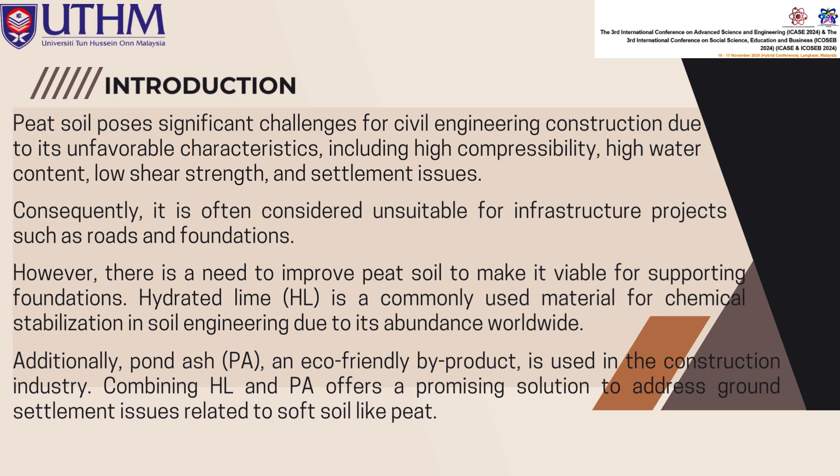To improve its suitability, hydrated lime and pond ash are used for stabilization. Hydrated lime is a widely available stabilizer, and pond ash is an eco-friendly byproduct. Combining hydrated lime and pond ash can effectively address ground settlement problems in peat soil. This study's objective was to modify peat soil by binding pond ash and hydrated lime together and to investigate the effect of this admixture on the strength of the modified peat soil.

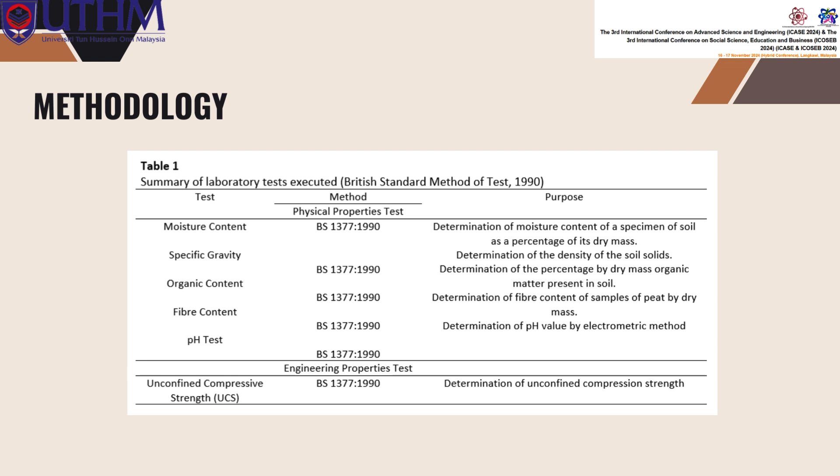Methodology: In this study, five physical properties tests including moisture content, specific gravity, organic content, fiber content, and pH test, and also one engineering properties test, which is unconfined compressive strength (UCS), were conducted. All tests were performed according to the British Standard Method of Test 1990. Table 1 shows the summary of laboratory tests executed. Moving on to result and discussion.

For physical properties, this study found that peat soil has an average moisture content of 811%, reflecting its high water holding capacity. This is due to the soil's organic composition, including partially decomposed plant material and intact plant cells. The high moisture content influences the soil's engineering properties, such as compressibility, shear strength, and permeability, which are important for soil stabilization, land use planning, and environmental conservation.

Peat soil has a relatively low and variable specific gravity of 1.36, primarily due to its high organic and water content and low mineral content. This value can vary depending on the degree of organic matter decomposition and the type of vegetation that formed the peat. This study found that the soil had an average organic content of 98.8%, characteristic of peat soil. Despite the high organic content, the specific gravity value of 1.36 is not significantly different from that of mineral soil.

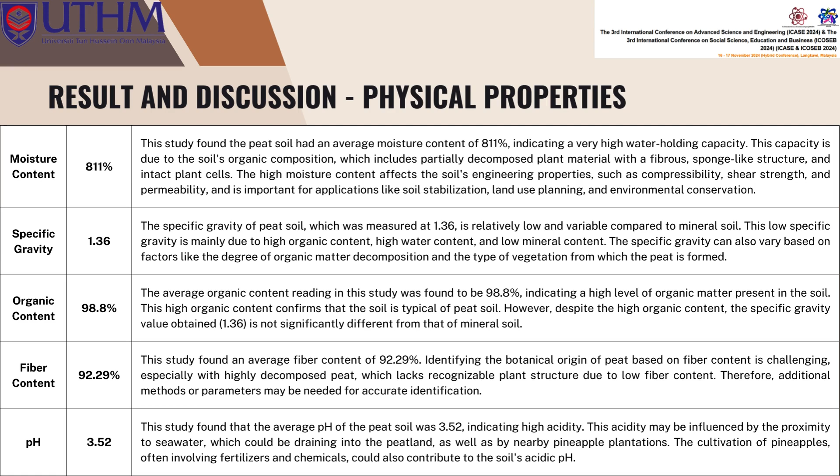This study also found an average fiber content of 92.29%. Identifying the botanical origin of peat based on fiber content is difficult, especially with highly decomposed peat lacking recognizable plant structure. Additional methods may be needed for accurate identification. Lastly, this study found that the average pH of the peat soil was 3.52, indicating high acidity. This acidity may be influenced by seawater drainage and nearby pineapple plantations, where fertilizers and chemicals could contribute to the soil's acidic pH.

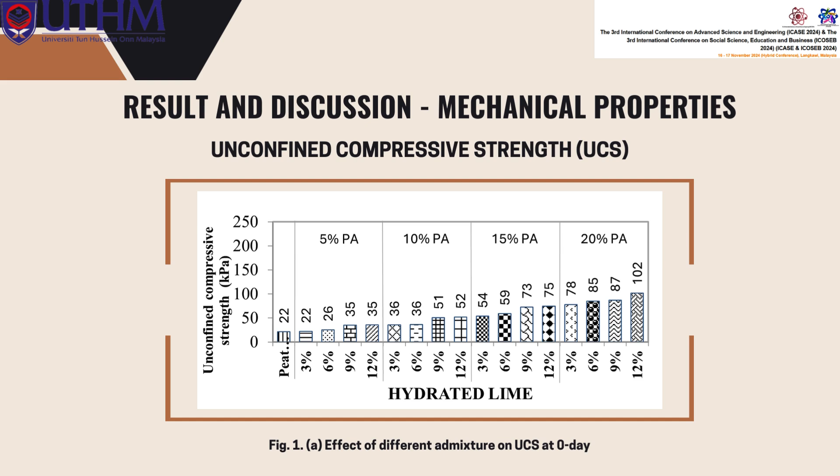Result and discussion for mechanical properties. Focusing on maximum stress value shows the treatment's effectiveness over time, but plotting complete stress-strain curves for each sample at different soaking times would offer a deeper understanding of soil behavior under various loading conditions. The strength of the treated peat soil increases with the addition of hydrated lime and pond ash, as shown in all samples. Figure 1a illustrates this, with strength rising as the pond ash hydrated lime content increases up to 50% of the original peat soil.

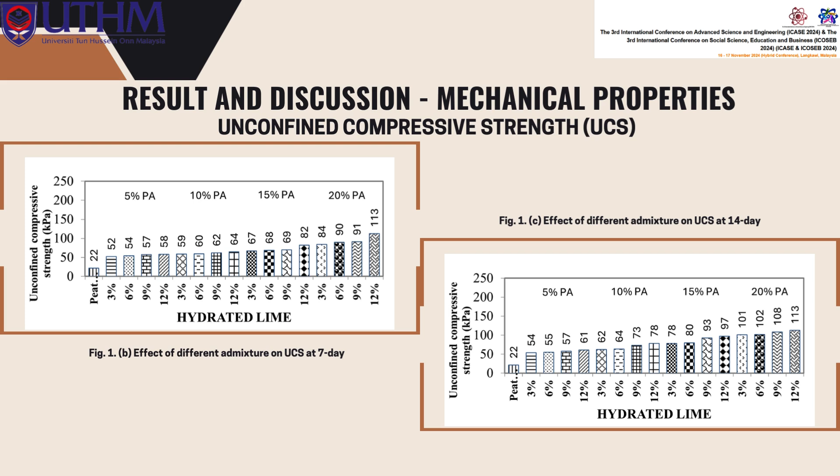For samples soaked for 7 days and 14 days, as depicted in Figure 1b and Figure 1c respectively, the strength continues to increase, reaching approximately higher strength of soil. This considerable increase in strength underscores the effectiveness of the treatment method involving hydrated lime and pond ash. The incorporation resulted in significant enhancement in characteristics, rendering it more suitable for various engineering applications.

The significant increase in strength after soaking the samples for 28 and 60 days as shown in Figure 1D and 1E is remarkable. Figure 1D shows a strength increase to 167 kilopascal, 7.6 times that of the untreated sample, while Figure 1E shows an increase to 188 kilopascal, approximately 8.5 times the untreated sample strength. This increase can be attributed to soaking, which enhances hydration in materials like concrete. The soaking process allows water to penetrate the material, completing the hydration of cementitious components, resulting in stronger bonds between aggregates and the cement matrix.

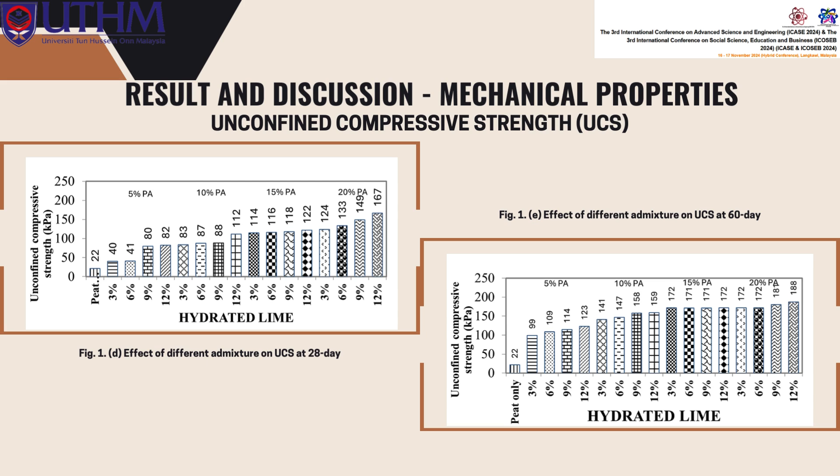Additionally, soaking can reduce material porosity, making it less susceptible to damage from external factors like freeze-thaw cycles or chemical attacks, thus improving overall strength and durability. These findings highlight the importance of soaking time in assessing the strength and durability of construction materials, suggesting that longer soaking times can significantly enhance strength characteristics.

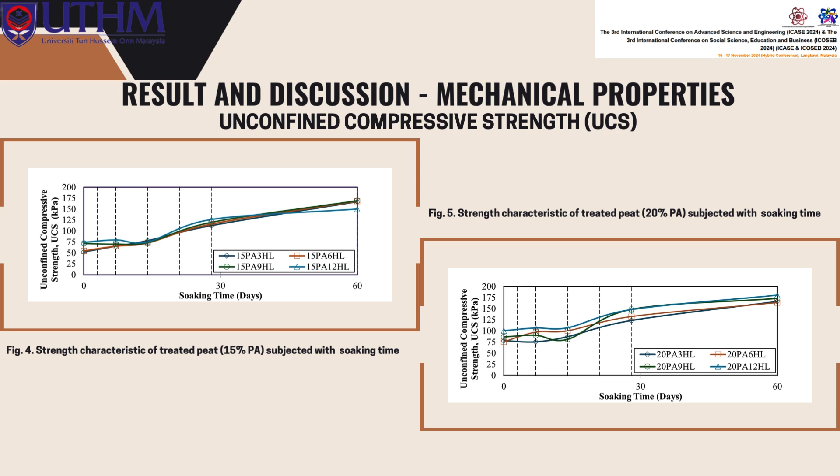Meanwhile, in Figure 5, Sample 13 initially shows a slight 3% decrease in strength. However, at the 60-day mark, strength increases by 39% and remains consistent thereafter. This indicates that despite an initial dip, the soaking process leads to a significant and sustained improvement in strength. Understanding this pattern is crucial for optimizing the soaking process and ensuring consistent strength characteristics in similar samples. Further analysis could reveal the mechanism behind this improvement and help refine soaking techniques for better performance.

The research aimed to stabilize peat soil by mixing it with varying percentages of hydrated lime and pond ash, then soaking the mixtures for 60 days. Unconfined compressive strength tests evaluated the effects of pond ash and hydrated lime. The following conclusions were drawn. The average moisture content was 811%. Specific gravity was 1.36, low due to factors like organic and water content. Organic content averaged 98.8% and fiber content was about 92.29%.

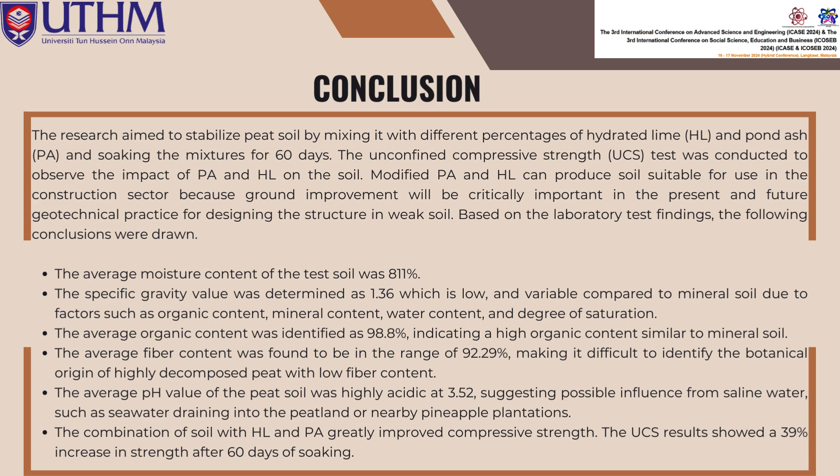The soil's pH was 3.52, indicating high acidity, possibly from saline water or nearby plantations, and combining hydrated lime and pond ash significantly improved compressive strength, with a 39% increase after 60 days.